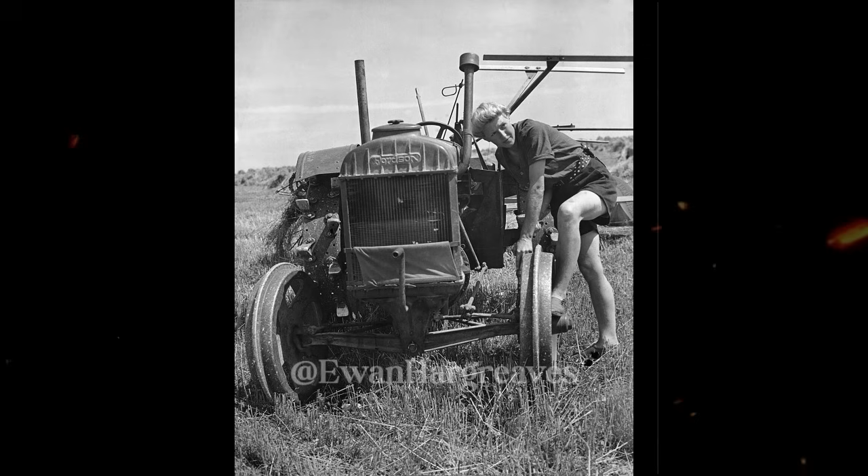Then someone mentioned Henry Ford and the little gray tractor he'd been hiding in Dearborn. Now, Ford had been tinkering with tractor designs since 1895. His first prototype was essentially a Model T engine bolted to a plow frame. It was ridiculous. It tipped over, it couldn't pull anything heavier than a small cart. But Ford kept at it.

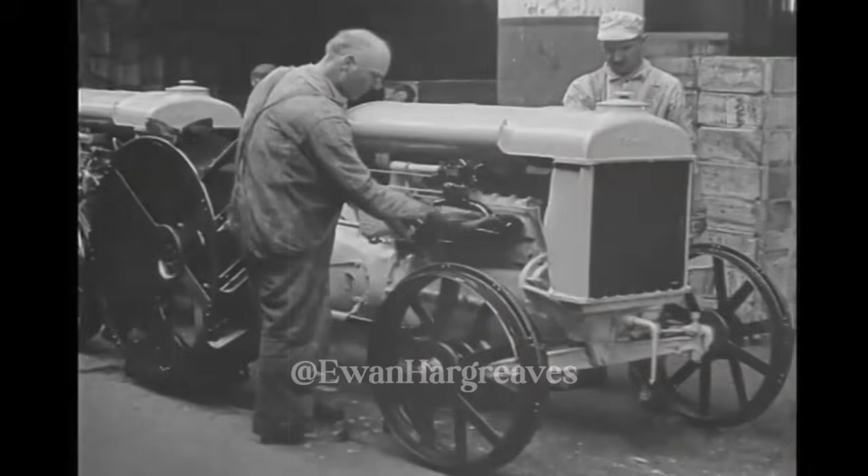By 1916, he'd built something genuinely functional: a lightweight, gasoline-powered tractor with a 4-cylinder engine, a 3-speed transmission, and a worm gear final drive. It could pull a 2-bottom plow through clay soil without breaking a sweat. 3 forward gears, 1 reverse. No cab, no fenders, no lights. Just engine, transmission, rear axle, and frame.

The whole thing was built like a bridge. The engine block, transmission case, and rear axle housing were bolted together to form a single stressed structure. No separate frame. This was radical. Every other tractor on the market used a heavy steel chassis. The Fordson didn't need one. The drivetrain was the chassis. This made it light, and lightness made it cheap, and cheap made it revolutionary.

The first shipment left for Britain in May 1917. By June, they were in the fields, and farmers who'd been plowing with horses for 30 years learned to operate them in an afternoon. So here's what nobody expected.

The Fordson didn't just work, it worked too well. By late 1917, Britain had taken delivery of nearly 7,000 Fordsons. They were showing up on farms across England, Scotland, Wales, Ireland, and the results were impossible to ignore. A single Fordson could do the work of 6 horses. It didn't need rest, didn't need feeding, didn't get sick, didn't die.

A farmer who'd been plowing 5 acres a day with a horse team could now plow 15, 20 if the soil was light. Food production in Britain stabilized, then increased. By 1918, British farms were producing more wheat, barley, and potatoes than they had before the war, despite having lost half their workforce.

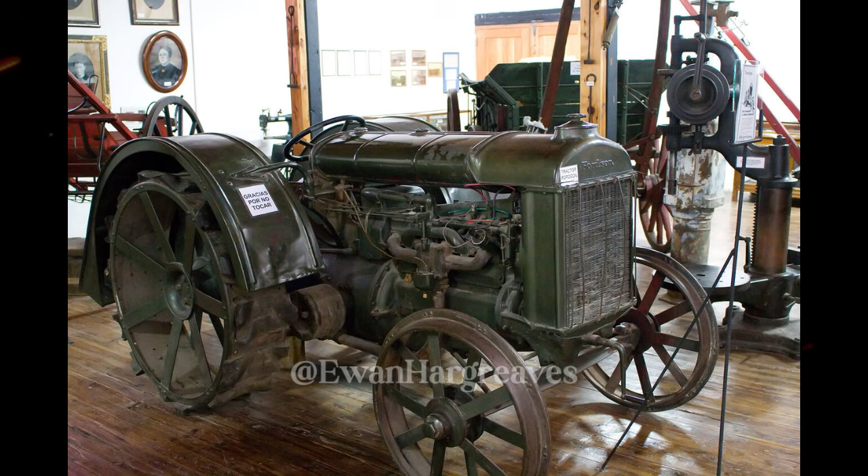But it didn't matter. Farmers didn't want cheap versions of old designs, they wanted the Fordson. By end of 1918, Ford had sold more than 34,000 Fordsons. In 1919, that number doubled. By 1920, Ford had captured nearly 70% of the American tractor market. Harvester's market share collapsed from 60% to less than 20%.

Other manufacturers started failing. Smaller companies, ones that had been building tractors for a decade, couldn't compete. The Waterloo Gasoline Engine Company, maker of the Waterloo Boy tractor, was sold to John Deere in 1918 just to survive. The Moline Plow Company merged with 3 other firms to form Minneapolis Moline. Hart Parr, once the largest tractor manufacturer in America, was absorbed into Oliver Farm Equipment. The Fordson wasn't just winning, it was erasing the competition.

But here's what's fascinating. The Fordson itself, it wasn't actually that good. Not technically. The engine was crude, cast iron block, no overhead valves, low compression. It burned fuel inefficiently. The cooling system was marginal, the tractor ran hot, especially in summer. The worm gear final drive, while strong, was also inefficient. It absorbed horsepower, generated heat, and required constant lubrication.

The steering was heavy, the brakes were terrible, the seat, if you could call it that, was a flat metal pan. The controls were awkward, the clutch was stiff. Shifting gears required muscle and timing. If you missed a shift, you'd grind the gears and possibly strip them.

And it was dangerous. The Fordson had a nasty habit of flipping over backwards if the plow hit a rock or a root. The rear wheels would lift, the whole machine would pivot on the drawbar, and the operator would be crushed underneath. Dozens of farmers died this way in the early years.

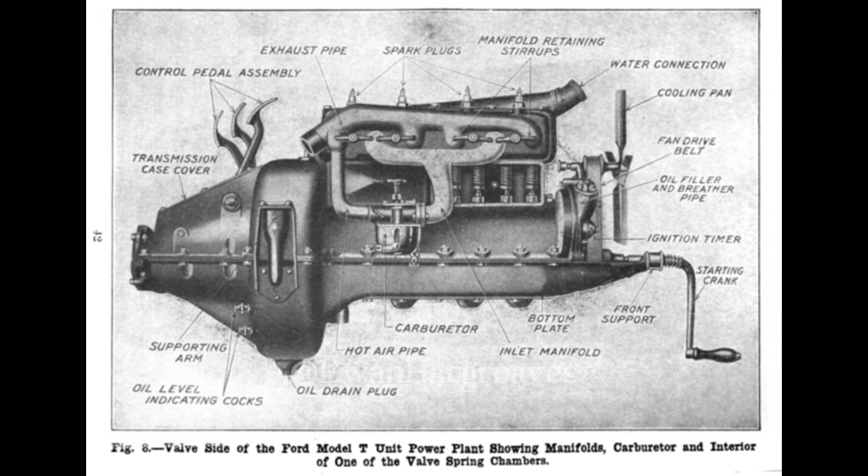Except the Fordson didn't get tired, didn't need rest, could run 12, 14 hours straight if you kept fuel in it. Fuel capacity was 10 gallons. Consumption was roughly 2 gallons per hour under load, so a full tank gave you about 5 hours of plowing. After that, you refilled from a barrel strapped to the drawbar and kept going.

Ignition was a low-tension magneto. No battery, no distributor, just a magneto driven off the flywheel. This was important. Most tractors in the 1910s used battery ignition. Batteries died, corroded, froze in winter. The magneto didn't care. As long as the engine was turning, you had spark.

Starting was done with a hand crank at the front. You'd set the throttle, retard the ignition timing, and crank. If you were lucky, it fired on the second or third pull. If you weren't, you cranked for 10 minutes. In winter, you heated the engine block with a blowtorch before cranking. Otherwise, the oil was too thick and the engine wouldn't turn over.

The transmission was a 3-speed sliding gear design. First gear was for plowing, pulling heavy loads through mud or clay. Second gear for lighter work, harrowing, cultivating, road travel. Third gear for belt work, running stationary equipment. Reverse was a single speed, same ratio as first gear.

Shifting required double clutching. You'd pull the clutch lever, shift into neutral, release the clutch, rev the engine to match the road speed, pull the clutch again, shift into the next gear, and release. If you mistimed it, the gears wouldn't mesh. If you forced it, you'd strip the teeth. Farmers got good at it, or they broke their transmissions.

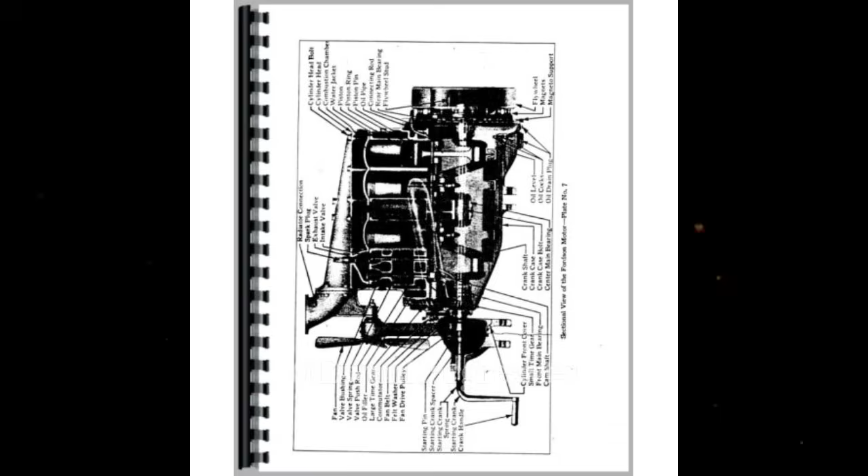The clutch itself was a wet multi-plate design running in oil. This was clever. Dry clutches burned out quickly under heavy load. Wet clutches ran cooler, lasted longer, but they also required adjustment. If the oil level dropped, the clutch would slip. If the plates wore unevenly, engagement would be grabby and violent.

Power went from the transmission to the rear axle through a worm gear reduction. The worm was a spiral gear on the output side of the transmission. The wheel was a large bronze gear mounted on the differential housing. This gave a final drive ratio of about 43:1, lots of torque multiplication, but also lots of friction. Worm gears are inherently inefficient, typically 70 to 80% efficient under ideal conditions. The Fordson setup was probably closer to 65%, meaning a third of the engine's power was being converted to heat.

This mattered. The rear axle housing ran hot. In summer, under heavy load, it could get hot enough to burn your hand. Ford's solution was to vent the housing and rely on airflow for cooling.

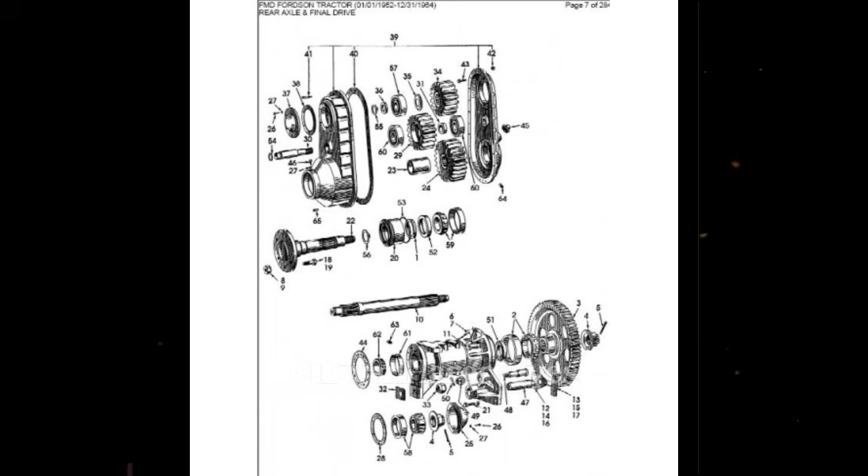It worked, barely. The rear wheels were steel, 42 inches in diameter with removable cleats. The cleats were just flat steel bars bolted to the rim. They bit into soil, provided traction, and chewed up roads. If you wanted to drive on pavement, you removed the cleats and bolted on flat rims. Most farmers didn't bother. They just drove on the cleats and destroyed the road surface.

The front wheels were smaller, 28 inches, also steel. No suspension, no springs. The tractor rode directly on the wheels. Every bump, every rut, every rock transmitted straight through the frame into the operator's spine. After a full day in the seat, farmers could barely walk.

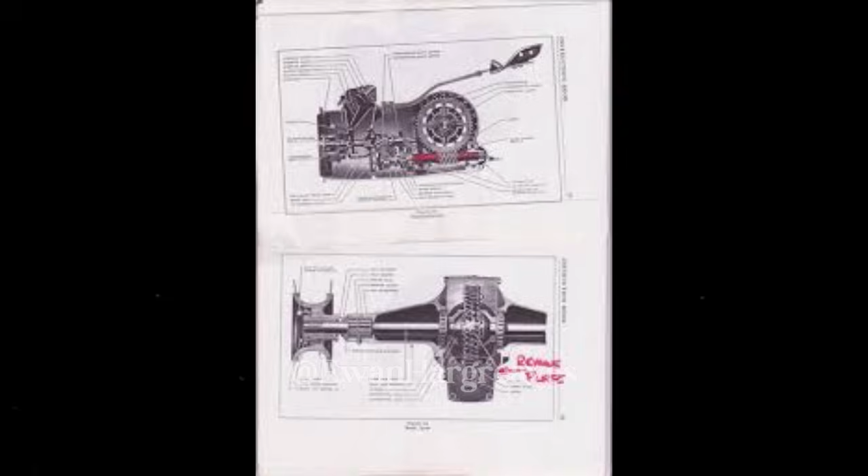Steering was manual, no power assist. The steering wheel was connected to the front axle through a worm and sector gearbox. Turning the wheel rotated the worm, which moved the sector, which pivoted the axle. At low speeds, steering required muscle. At high speed, it required strength and timing. If the front wheels hit a rut while you were turning, the wheel would spin out of your hands and possibly break your fingers. The drawbar was mounted low, just above the rear axle.

This was intentional. Low mounting point reduced the chance of the tractor flipping backwards under load, but it didn't eliminate it. If the plow hit an obstacle, the resistance would try to lift the front end. If the load was heavy enough or the hitch point high enough, the tractor would pivot. The front wheels would lift, the rear wheels would keep driving forward, and the whole machine would flip over backwards, crushing the operator. Ford eventually added a safety feature, a hinged seat that would dump the operator off the back

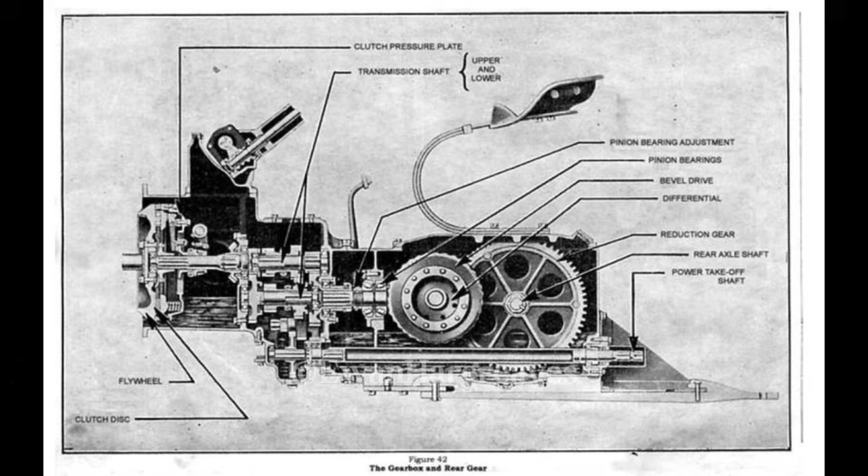as the tractor started to flip. It saved lives, but it also resulted in farmers being thrown off moving tractors into the path of whatever implement was being towed. So, not perfect. The Fordson had no brakes on the early models, none.

Stopping required pulling the clutch and letting the tractor coast to a halt. If you were on a hill, you put it in gear and let the engine compression slow you down. If that wasn't enough, you steered into a ditch. Later models got a single rear wheel brake operated by a foot pedal. It worked, sometimes.

Despite all these flaws, the Fordson was easy to maintain. The entire engine could be rebuilt with basic hand tools: a wrench set, a screwdriver, a hammer. You could pull the cylinder head, replace the gaskets, regrind the valves, and have it back together in a day. Parts were standardized, mass-produced, and cheap. A replacement piston was $2. A full engine rebuild kit was $30.

This was revolutionary. Other tractors required specialized tools, factory-trained mechanics, and weeks of waiting for parts. The Fordson could be fixed by anyone who could read a manual, and Ford made sure the manuals were simple—step-by-step instructions, clear diagrams, written for people who'd never worked on an engine before.

So by 1920, the Fordson had basically conquered America. Over 100,000 units sold. Ford's Dearborn factory was running 3 shifts, producing 300 tractors per day. Dealerships were opening in every farming town in the Midwest. International Harvester was bleeding market share. Smaller manufacturers were going bankrupt.

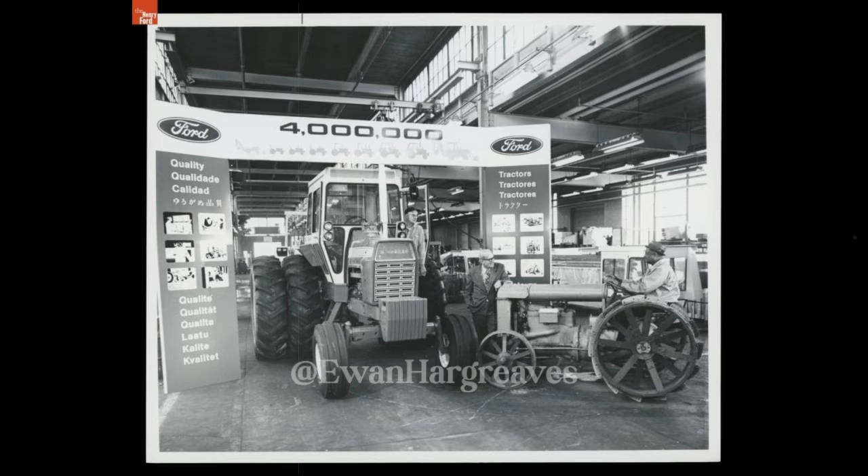And then Ford did something unexpected. He moved production to Ireland. Now, this wasn't just a business decision—this was personal. Henry Ford's father, William Ford, had emigrated from County Cork in the 1840s during the potato famine. Henry had never forgotten that. He saw Ireland as his ancestral home, and he saw an opportunity.

In 1919, Ireland was a mess, still part of the United Kingdom, but barely. The Irish War of Independence was escalating. The economy was collapsing, unemployment was rampant. Ford thought he could help. He'd build a factory in Cork, employ Irish workers, manufacture Fordsons for the European market, and maybe, just maybe, stabilize the region. He broke ground in 1919.

The factory opened in July 1920. It was massive, purpose-built for tractor production—integrated foundry, machine shop, assembly line. Ford transferred entire production tooling from Dearborn to Cork. By end of 1920, the Cork plant was producing 100 tractors per day.

But here's the problem. Ford had miscalculated. He'd assumed European farmers were like American farmers. They weren't. European farms were smaller, fields were irregularly shaped—hedgerows, stone walls, narrow lanes. The Fordson, designed for wide-open Midwestern prairies, was too big, too powerful, too clumsy for European conditions.

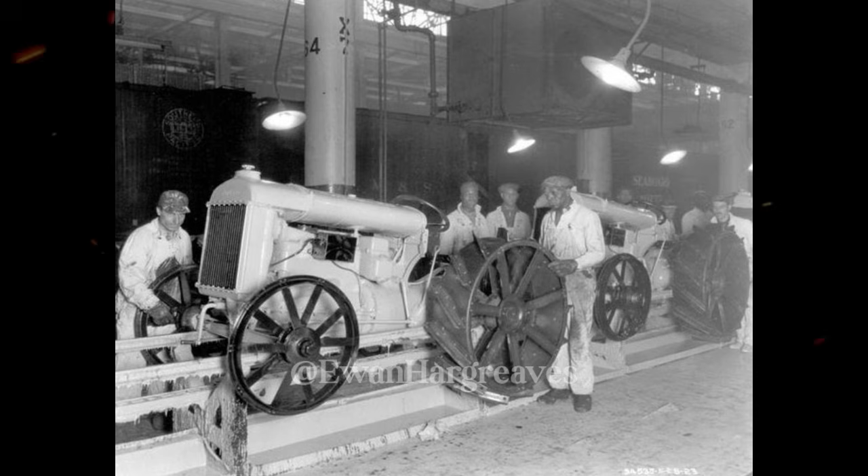And European farmers, especially in France and Germany, preferred horses. Horses didn't require fuel, didn't need spare parts, didn't break down. Sales in Europe were disappointing. Ford responded by cutting prices again. By 1921, the Fordson was selling for $625 in the US, even less in Europe.

Harvester matched, then undercut, then matched again. It became a price war, and price wars destroy profit margins. By 1922, Ford was losing money on every tractor he sold—not a little money, a lot of money. The Dearborn factory was hemorrhaging cash. The Cork factory even worse.

Ford kept both plants running anyway, because Ford didn't care about short-term profit—he cared about market share. And he was winning. By 1922, Fordson held 75% of the American tractor market.

But Harvester wasn't done. They'd been working on a response, and in 1923, they released it: the Farmall. Now, the Farmall wasn't technically better than the Fordson. It used a similar engine, similar transmission, similar final drive, but it had one critical advantage: adjustable wheel spacing.

See, the Fordson had fixed wheel widths. You couldn't change them. This was fine for plowing, but terrible for cultivating. Cultivating requires driving between rows of crops without crushing them. Row widths vary—corn, wheat, cotton, potatoes, all different. The Fordson couldn't adapt. The Farmall could. You could adjust the rear wheels to match any row width. This made it a true general-purpose tractor.

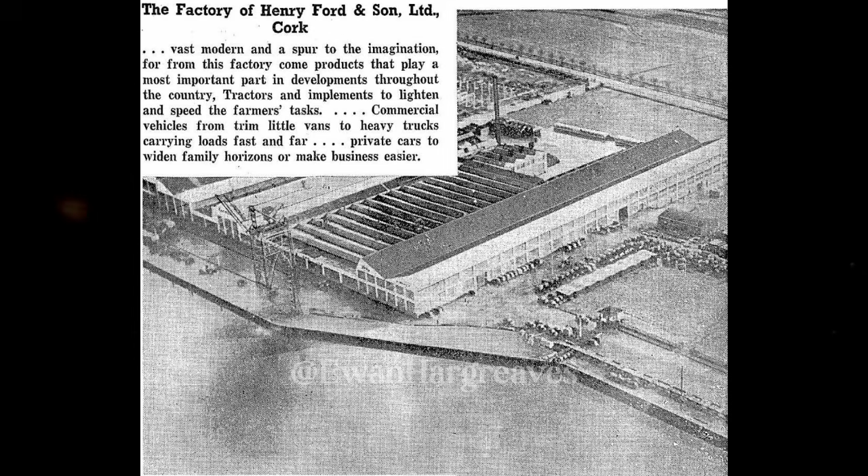So here's the thing people forget: the Fordson didn't succeed because it was a good tractor, it succeeded because it was cheap, and that distinction matters. By any technical measure, the Fordson was mediocre. It was underpowered compared to its competitors, it was uncomfortable, it was dangerous. It had no meaningful advantages in design or engineering. What it had was price, and price, in mass markets, beats quality every single time.

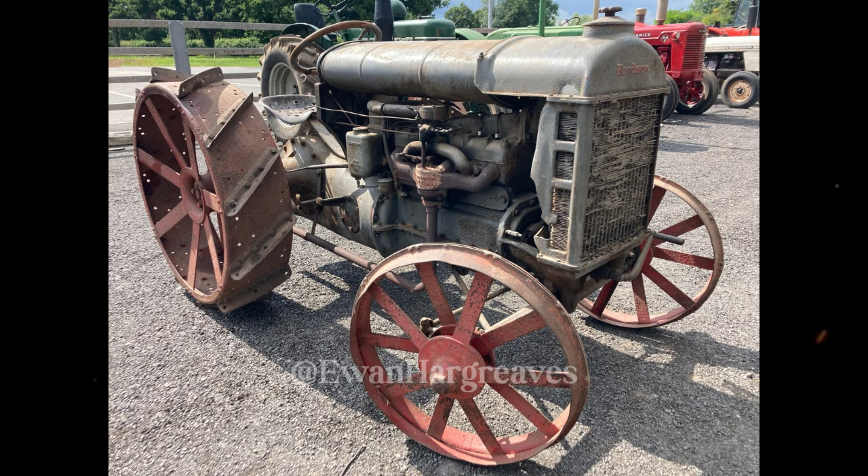This strategy, by the way, is why Ford Motor Company exists today, and it's why most of Ford's competitors from the 1910s and 20s don't. Ford understood mass production, understood economies of scale, understood that if you can make something cheap enough, fast enough, you can dominate a market before anyone else figures out how to respond. The Fordson sold over 700,000 units between 1917 and 1928 in the U.S. alone. Add in production from Cork, and the total exceeds 750,000. No other tractor model even came close before World War II.

And the impact? The impact was staggering. In 1920, American farms used over 25 million horses and mules. By 1950, that number had dropped to under 8 million. By 1960, under 4 million. The horse didn't just decline, it was erased, replaced by steel, gasoline, and the manufacturing efficiency Henry Ford pioneered. This had cascading effects. Farmland that had been used to grow hay and oats for horses was converted to cash crops. Food production per acre increased. Fewer workers were needed. Small towns emptied. The American landscape fundamentally changed.